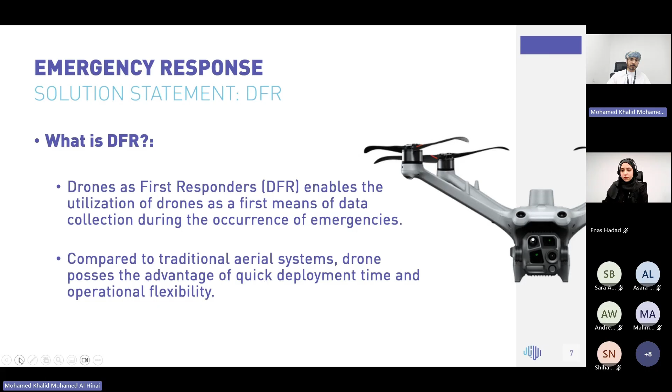At ISBAR, we're currently introducing DFR solutions, splitting them into 2 different technologies. The first is drone autonomous stations, which allow for immediate deployment through dynamic perspective capture, solving the first issue. Tethered drones allow us to monitor the entire facility from a fixed position over an extended period of time, solving the second issue, which is extended situational awareness.

I'll give a brief overview of what a docking station is. It's responsible for housing, charging, and automating a fully integrated unmanned aerial system, otherwise known as a drone. It allows for quick dispatch and data collection in high-risk areas, so it can independently take off and fly within these emergency areas, eliminating the need for a pilot to be positioned within the operational zone. The docking station allows the drone to be deployed remotely without a pilot in the field, reducing associated risks with emergencies.

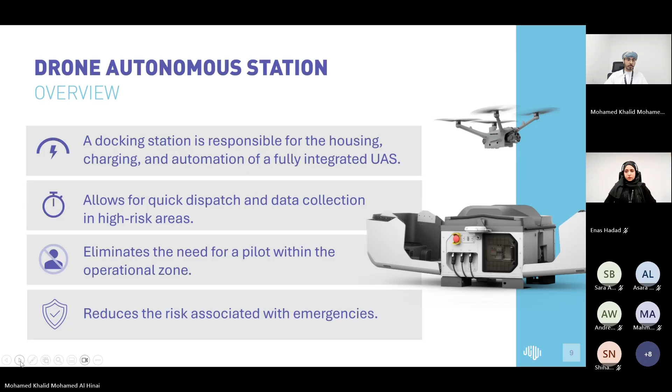Currently, ISBAR operates multiple docking stations for emergency response. We utilize our docking station MESBAAR 1, designed to be operated in very difficult conditions. It has an operational temperature of up to 50 degrees Celsius. The dock itself is IP56 rated, and the drone is IP55, meaning it can operate in very dusty and rainy conditions without any interference. It's equipped with internal cooling, keeping the drones and systems cool even in very hot climates.

It's equipped with automated smart charging, meaning it wirelessly charges the drone after it lands in the dock, and it has an endurance of 45 minutes, providing sufficient time to collect aerial intelligence and capture images and data, and a turnaround time of 27 minutes, which refers to the charging time of the drone.

It's also equipped with an integrated weather station, assessing environmental conditions prior to takeoff. If the weather is too windy or rainy for the drone, it will automatically prohibit takeoff, ensuring operational safety. It's also equipped with automated pre-flight checks, including weather status assessment, connectivity assessments, and other forms of assessments. It can be pre-programmed with certain flight routes, allowing for automated operation, and these flight routes are integrated with AI-enabled features, allowing us to conduct fully automated operation and reporting.

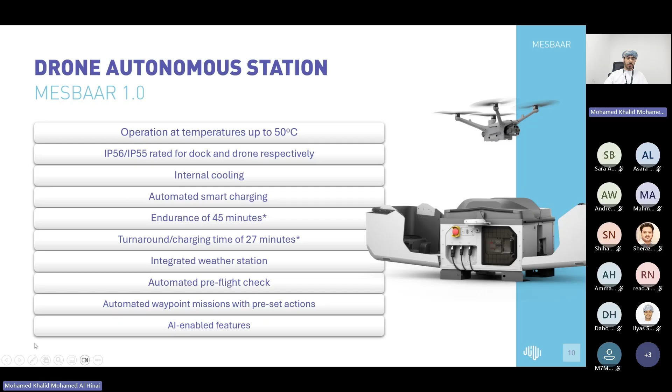So the drone itself is equipped with an integrated payload consisting of an EO/IR camera system, or electro-optic and infrared camera system. The electro-optic system utilizes a triple sensor layout of 48 megapixels. It possesses 112x hybrid zoom, so it can zoom into targets or objects from kilometers away.

It's also equipped with an 1,800 meter laser rangefinder, which allows us to identify or pinpoint the location of objects that the camera is pointing at. And it supports full color night vision with the use of a near infrared auxiliary light.

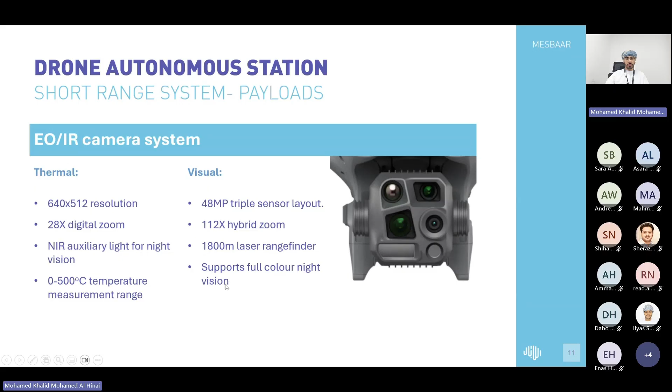Now, when it comes to auxiliary payloads, the drone can be equipped with two different auxiliary payloads. The first one is an illumination kit, which is basically a spotlight used to point at the ground and illuminate it. It follows the camera, so when the camera looks up, the spotlight will look up with the camera. It allows for a variety of fields of view, so it can focus on a certain area or do wide field illumination.

The drone itself is also equipped with a broadcasting kit, which is basically a loudspeaker that allows us to relay audio in three different ways. The first is text-to-speech, so we can type in a sentence and the drone will electronically relay that. We can also upload pre-recorded messages, and we can relay our voice in real time. The payload has 114 decibels maximum volume, which allows us to broadcast up to a distance of 300 meters.

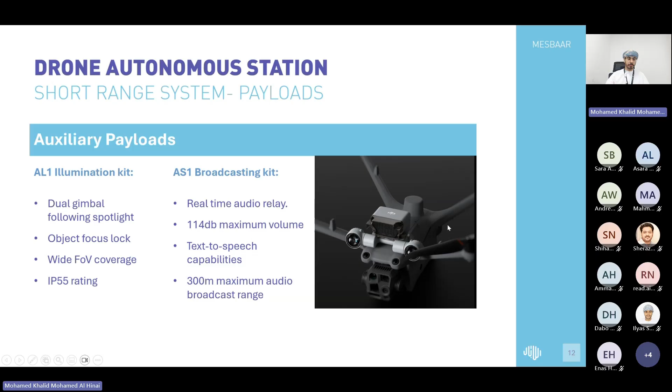So how does the system actually work? Like I mentioned earlier, it's a fully automated system. The pilot would simply deploy the drone remotely from his computer, from his platform. The drone will automatically take off and head to the emergency site. It will collect visual data, thermal data, and all of that live video feed will be relayed in real time to the relevant personnel. Once the drone completes its mission, it will return back to the dock, land, recharge, and prepare itself for the next deployment.

Now, at any time during the operation, the pilot can also manually take over control to assess the situation further and make sure that he covers the area in a more comprehensive manner.

The docking station can also be connected to various IoT devices. So let's say you have a temperature sensor that is set to a threshold such that when it detects a fire, it will be triggered. This temperature sensor can trigger the drone to take off during a fire and assess the situation prior to any emergency vehicles arriving at the site, in order to ensure the criticality of the situation and assess the damage before sending human personnel to the area.

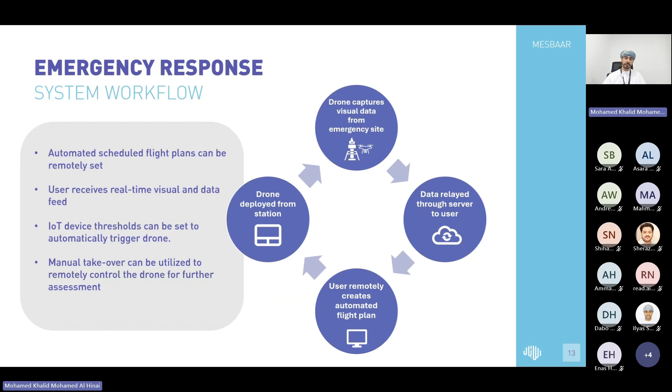So the various data types that the drone can collect during the emergency can include casualties, headcounts, and coordinates. For example, if there are a set of casualties or injuries, we can maintain a head count and identify the exact coordinates of every single individual within the facility.

It can also determine the nature of the emergency and its criticality. So let's say you have a fire, we can determine the severity of the fire, the size of the fire, and understand exactly its position and location.

In addition to that, we can also inspect different areas such as emergency gate accessibility and entry and exit routes accessibility. That would include, for example, if the fire has obstructed the entry and exit routes and the emergency gates, and if there's any foreign objects and debris located within that area. We can collect all of this kind of data through the docking station and the drone.

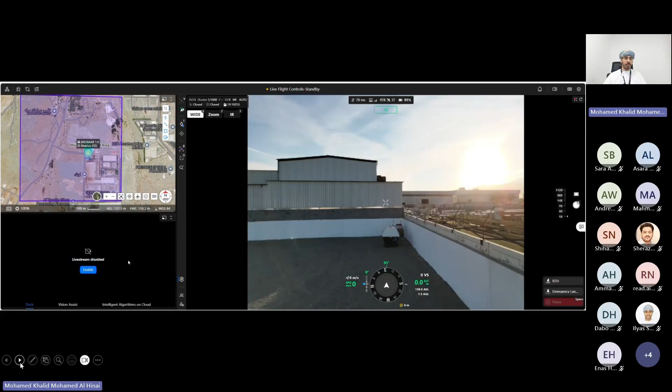So this is a brief demo of how the drone automatically deploys. Just a video we utilized to locate different individuals in a certain area.

So the drone would notify us as soon as it detects individuals within the area. Let's say this is an emergency zone, and we want to make sure the area is clear of people. We would do a quick scan of the area.

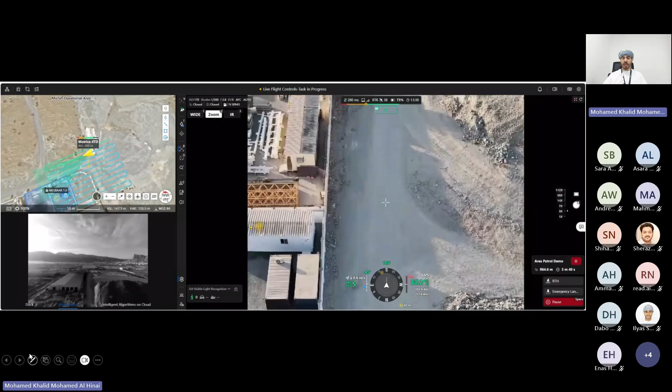As soon as individuals are detected, we're immediately notified. The drone would stop, and they're detected using artificial intelligence. At the same time, we would receive an email and a message informing us that there are individuals located in this facility, along with images and their exact coordinates.

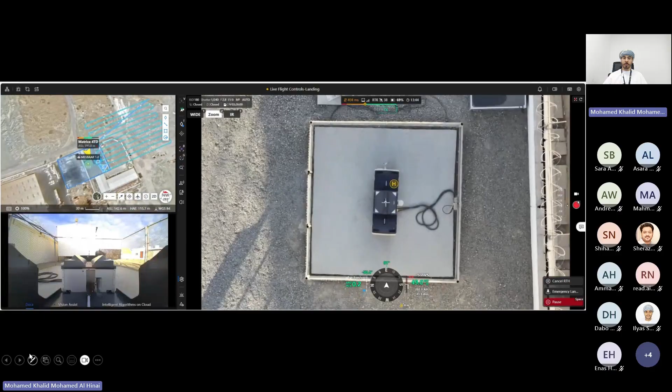This is another example of it patrolling the perimeter. As soon as an individual is detected, the drone automatically zooms into them, captures photos, records a video, and then sends us an email and notification informing us that there are people still within the site.

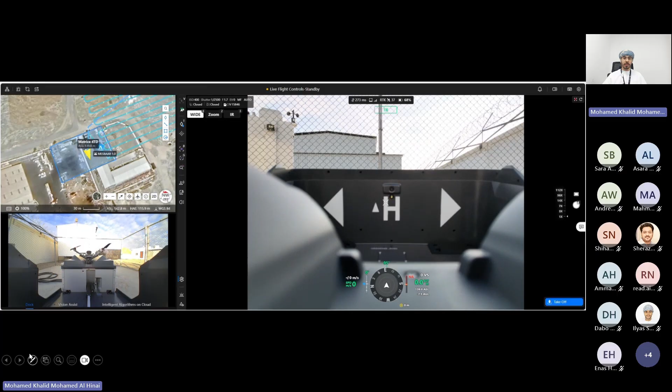Once the operation is completed, the drone will return back to the dock and automatically land. This is done completely without any human intervention. The drone would utilize its own RTK positioning sensors to position itself towards the dock. Once the landing is completed, the dock covers would close, and then the drone would begin charging, preparing itself for the next deployment.

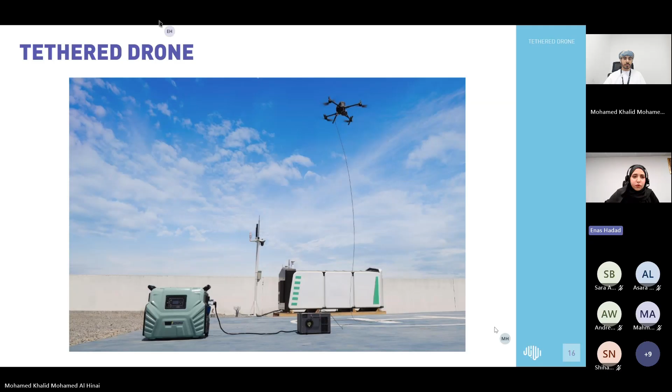Through the connection of the tethered drone itself to a ground station with a cable, this will provide the drone with continuous power. Instead of relying on the drone battery, which lasts a maximum of 45 to 55 minutes in optimal cases, it will be enabled to fly for up to 12 hours continuously.

This will enable the operators in such cases or emergency drills, for example, to focus on the situation itself, giving them full situational awareness over the event instead of worrying about battery landing and frequently changing it. This boosts emergency response safety and efficiency of the work.

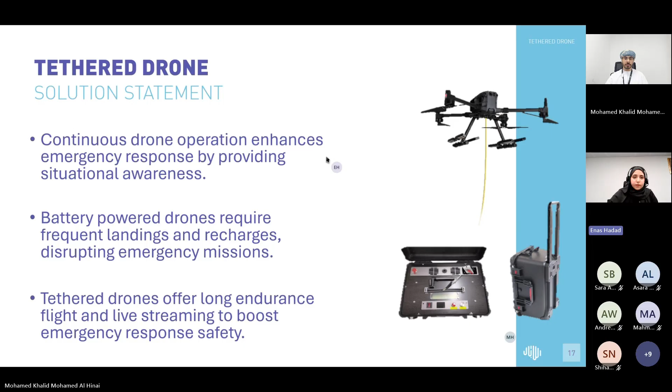When it comes to the advantages of the tethered drone technology, first and most important is operational safety. It enhances the safety of first responders and personnel in such situations, and also enables them to monitor hard to access areas. The control team monitoring the situation can have a live stream where they can monitor it even while in an office.

The second thing is extended flight time. Instead of operating on the drone's 45-minute battery, it will be enabled for up to 12 hours continuously. This reduces the downtime of removing the battery and changing it to a new fully charged one.

The last important thing is ease of use of such technology, because the operators should not be bothered by the complexity of deploying the system, so it should be easily deployed.

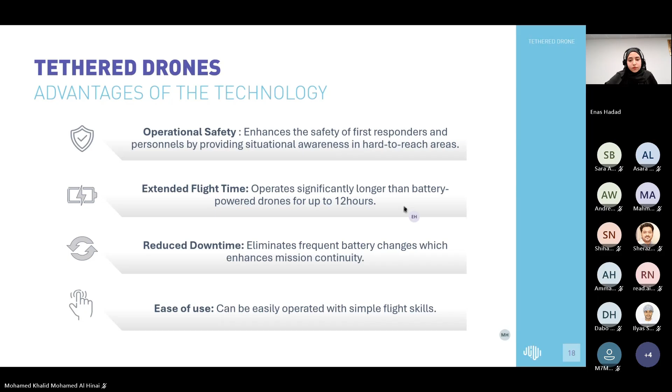When it comes to the criteria for choosing our tethered drone, a lot of models are there in the market. However, for Oman's specific environment and situation, we need criteria specifically designed for this environment and type of operation. The first one is environmental adaptability, so it should have thermal tolerance, IP rating, and wind resistance that fits Oman's environment.

The second thing is that the system must have tether management, because imagine having a cable or tether flying or blowing in the air, that would cause a lot of risks to the facility or operators there. So the system must contain tether management to reduce tangling or excessive drag due to wind.

It should also have a backup flight power battery, in case of power failure, to make sure the monitoring of the situation continues. The system must be portable as well.

So whenever the operators would like to deploy the system, they should have the ability to launch it in a fast manner. It should also be an integrable system, so it should be able to be integrated with different drone models as well as the payloads. For example, it can be integrated with a camera, or it could be integrated with a broadcasting system for voice or light.

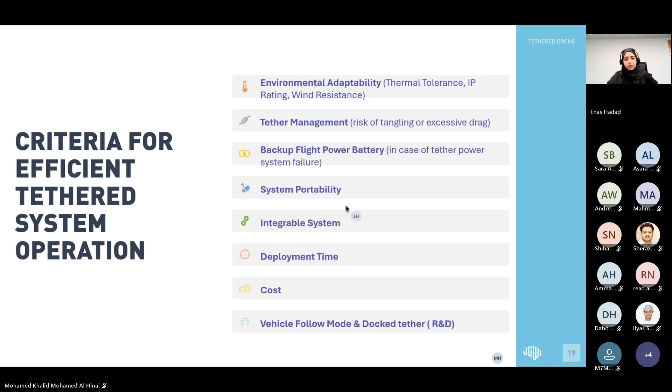So when it comes to the solution that we have currently in Aspire, the features and capabilities are first of all supported with live streaming capability. Through a dedicated link, all the operators in the field or on site can have a shared secured link where they can monitor, and also coordinate with people on site how the operation should be.

It's also supported with AI features. Those AI features could be, for example, people counting, some kind of incidents. This will make the monitoring and control over the situation smarter and more intelligent, so the operators can have an automated alerting system for any type of incident that requires deep intervention.

The second thing is that our system is supported with versatile payloads. It can be equipped with cameras, both visual and thermal for night vision. It can also be equipped with floodlights, so for example in situations where there's no light, it could be at night, the drone itself can be used as a light system to enable the operators to have vision in such areas.

It can also be equipped with a communication relay. So imagine a situation, and it can happen, where the network can be shut down. The drone itself can fly and work as a relay to have communication enabled in those areas. It can also be equipped with multiple other payloads, but those that we recommend specifically are for emergency response payloads.

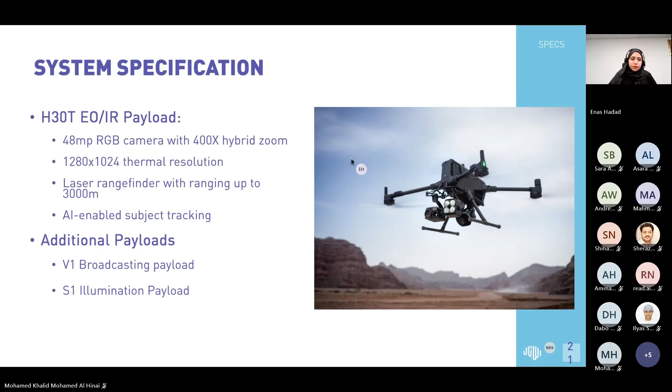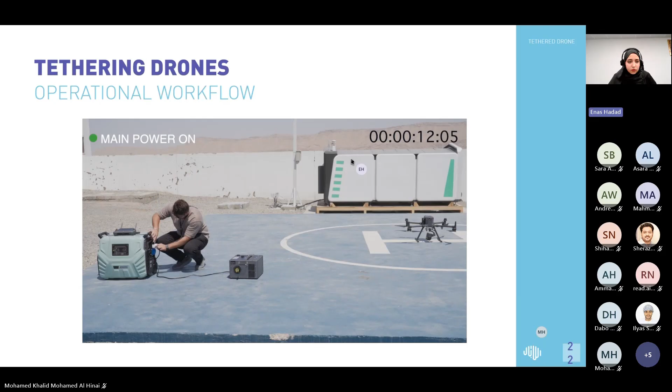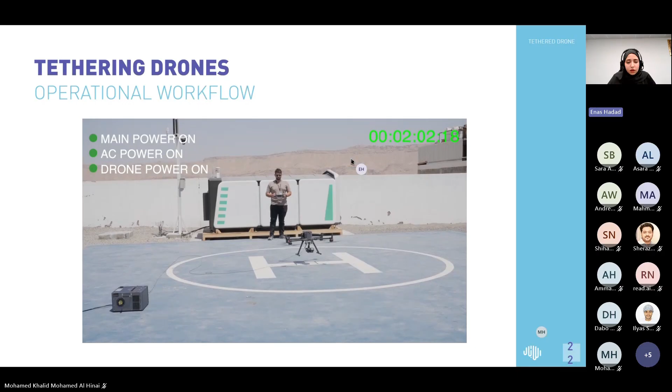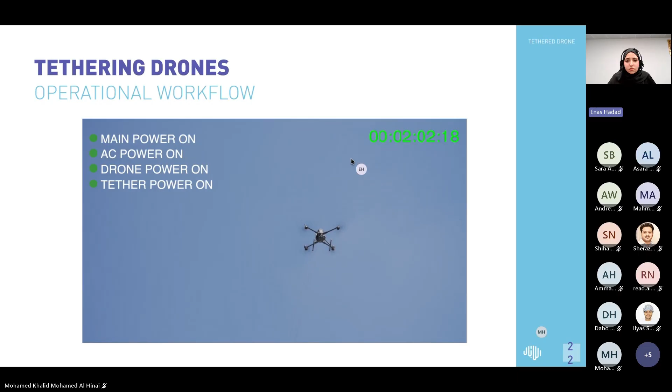This is a demo showcasing how the tethered drone operates, done in our testing field in Misfell. As we can see, the timer on the top right shows how fast the system can be deployed. The operator connects the tether system, in the middle box, to a power source, which could be a ground battery bank, a ground outlet, or even a car. Through the cable it connects to the drone, and the operator can fly it to a desired height and leave it there for up to 12 hours. In this case, the operation took only 2 minutes to deploy the system.

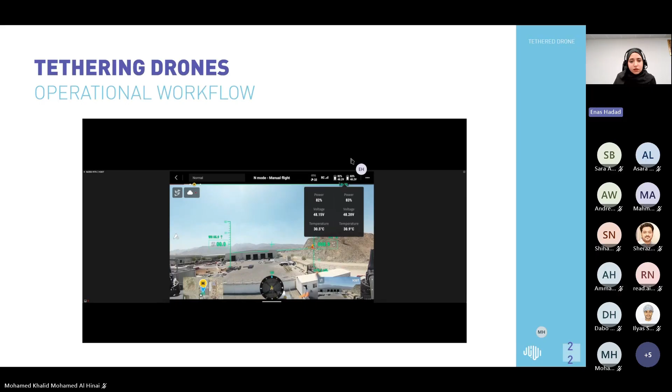This part shows the live streaming. As we can see to the right, the endurance of the drone increases - usually it can show up to 35 or 55 minutes, but in this case the estimated flight time increased to up to 300 minutes.

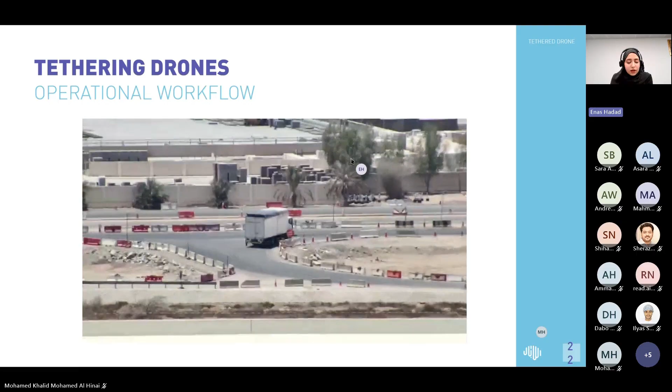The drone was scouting over the area. Now it will zoom to those tanks, which are actually 5 kilometers away. The specs of the H30T camera enable us to still see the details, the name of the tank, the label, even though it's 5 kilometers away. This is the real view of the drone. This just shows how amazing the camera is, and how, despite the limitations and challenges, the technology right now still allows us to monitor these faraway assets.

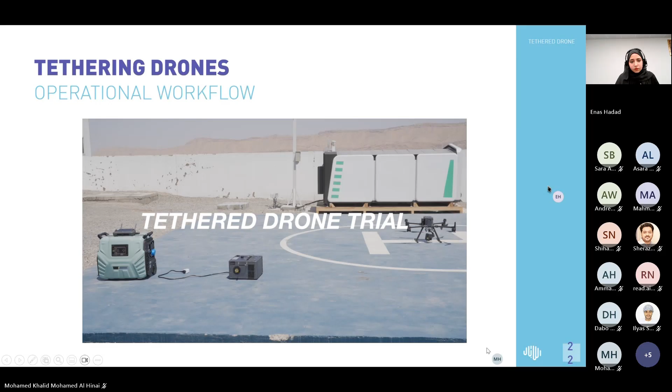Another solution that adds very interesting value is the cargo drone. Instead of relying on cars or people to move cargo, we can use drones to do that. Some might think why use a drone for such a high-value technology, but in emergency response where we want to move critical deliveries, like first aid, or move things at night or to a remote position like mountains, using drones is very efficient for deployment time. Imagine if it's a car - you need to pass roads, and there are a lot of limitations on the ground. But in the sky, the drone can fly immediately through a dedicated path, reducing deployment time, delivery speed, and improving operational flexibility.

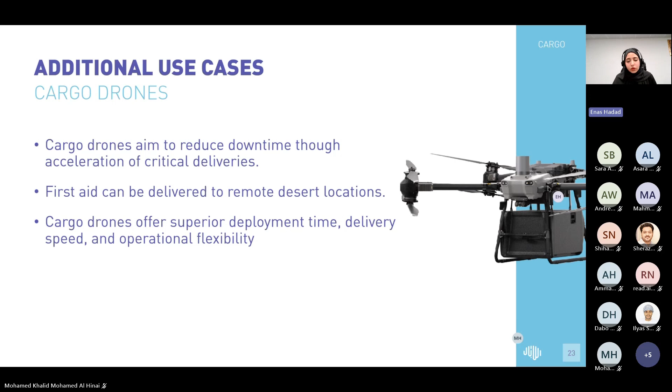Sometimes you don't have the resources to move things, and in such situations people can't tolerate delays. When it comes to emergency responses, first aid specifically, those situations require a solution that can execute the mission without delay. So the cargo drone is an optimal solution for that case.

Moving on to the project that ISPAR successfully conducted, a very high emergency drill level - a level 3 drill in an oil and gas facility. In this project, we were able to successfully validate and test both solutions, which we believe are complementary. We tested the docking station and tether drone for different purposes: monitoring the situation and scouting. The tether drone was used for continuous monitoring of the whole drill event, while the docking station was used to scout and do people and injuries counting.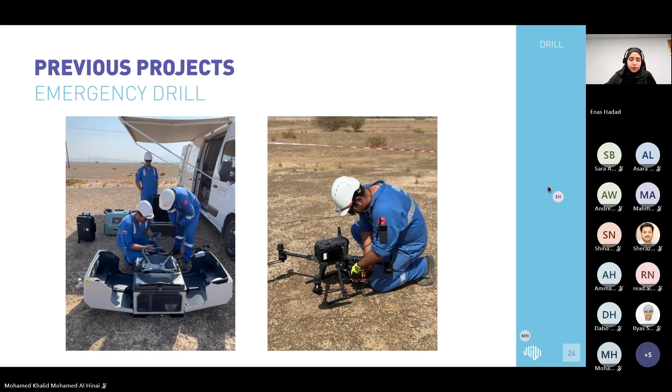The tether drone was flying continuously for almost 5 hours to monitor the whole event from a fixed position. It was equipped with a thermal camera for visual and thermal monitoring of the situation, as well as providing thermal monitoring over fires or any other anomalies. The entire drill was live streamed through a secured, password-locked link, so not anyone can access it.

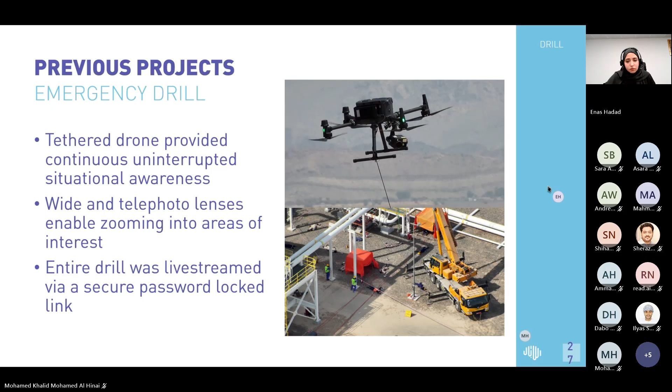Only people permitted with a certain password can access and monitor the situation. The docking station, on the other hand, was used to allow us to have scouting. Some angles and positions required scouting over the area to identify casualties, and AI was used to count people and continuously monitor individuals over the area. So both the dock and the tether system were used to complement each other, each providing valuable value for the drill. The nice thing is both are enabled with AI and a recording system, so whenever any event occurs, a timeline is recorded and a direct report or alarm is enabled.

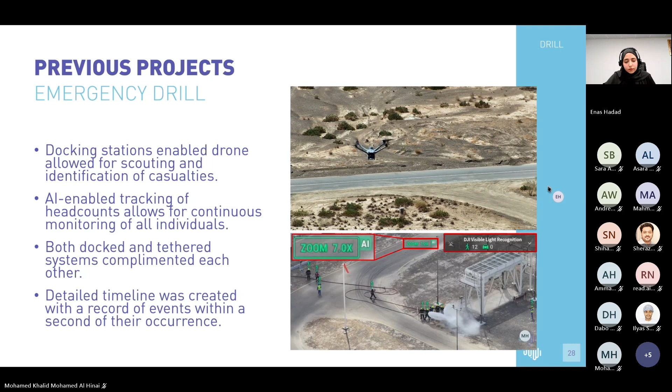When it comes to the DFR stations or system, the main added value is that, first of all, it eliminates the need for on-site personnel. This is one of the most important things - we don't want to risk people's lives in these situations. The docking stations and tether drone eliminate the need for, for example, emergency responders or police on site. They can still monitor it, but through drones.

It also improves the perspective. Instead of having the perspective of a human or vehicle, a drone can have a much improved and wider perspective of the situation in those areas. It also increases operational efficiency because of the improved perspective and the ability for not only the operators to see the situation, but also the people in control - officers, for example, have on-hand decisions and are enabled to see. This ends up increasing the efficiency of the operation, and all of that reduces response time.

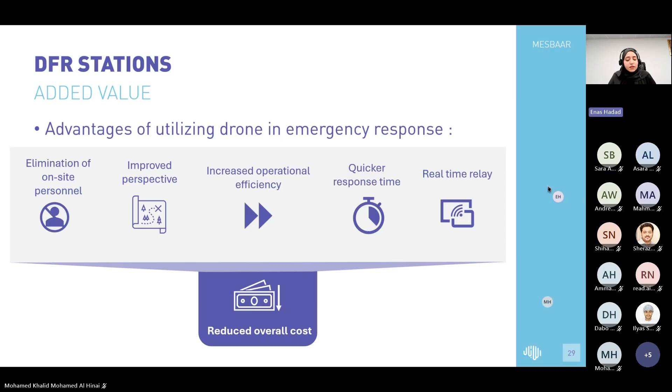Whenever you have better situational awareness, you're able to respond to the incident in a better manner. And the last thing is real-time relay. All of this ends up reducing the overall cost - of money, of lives, of facility damages as well. So whenever you look at using drones for emergency responses, from our perspective, they add very high value.

When it comes to the use of those solutions, it's not actually limited only to emergency response, even though we consider it the highest added value. There are a lot of other use cases where those systems can also be used and be pretty beneficial.

For example, security patrols. Whenever we have a facility where we want routine patrols and automated reporting, the docking station is considered an optimal solution. Instead of deploying a team on site, you can just leave the drone docking station there with an automated reporting path to fly. You can leave it there and fly it autonomously without the need for any human intervention.

Also routine facility inspection, for example tanks, flares, and general facility inspection. This is specifically added value for oil and gas, where the criticality of those facilities requires continuous monitoring to make sure that all operations are going as expected.

Construction monitoring is one of the niche ways to use docking stations and tether drones. Instead of relying on a human, the management team or engineers monitoring construction can have a docking station or tether drone fixed at a certain position, continuously monitoring those areas using AI, with everything automated through a dashboard to manage the timeline, resources, and how things are deployed. Any violations, misuse, concerns, or risks can be detected, reported, and visualized to the engineers or manager through a dedicated dashboard. The last use case is emergency response, because of the value of having immediate situational awareness over those situations.